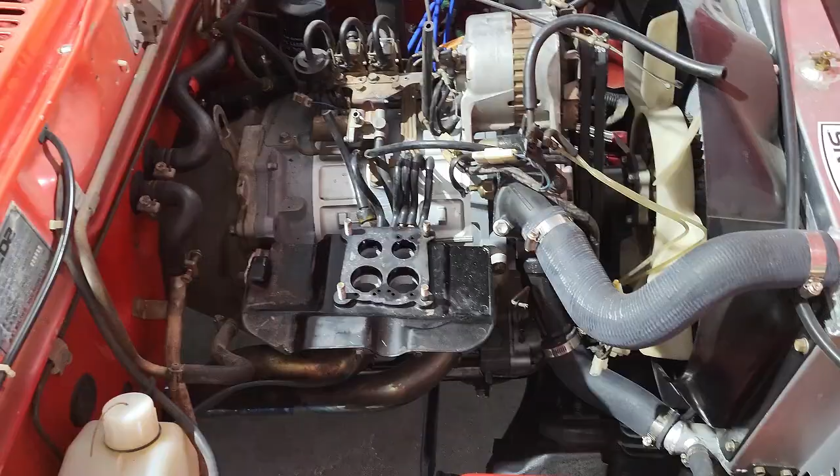Basically, I've already got the carburetor off. It is very simple to do. Got to pull a couple vacuum lines, and there are 4 nuts that are difficult to get to. Not impossible, just a little difficult. You gotta have some magic tricks up your sleeve to be able to get it off. So here is the cute little 12A engine. Yeah, it's literally just those 4 studs that hold the carburetor on.

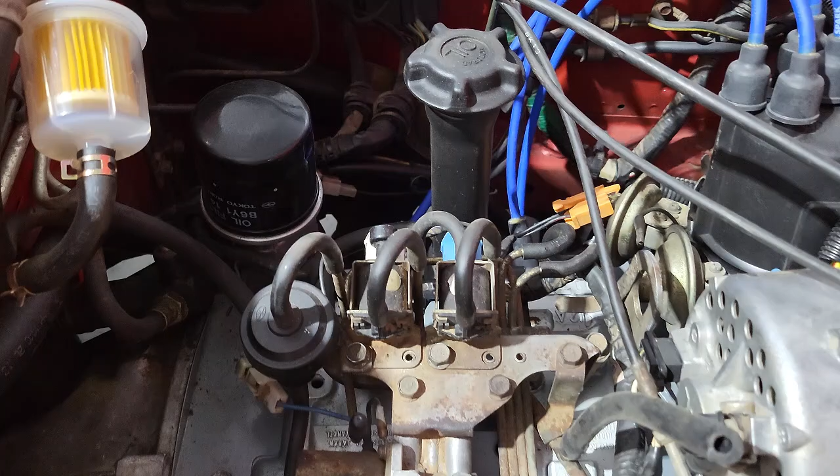This engine still has the vacuum diaphragms, or solenoids, I should say, though the air pump has been removed, and it has a header on it, so the back exhaust flow through the intake has been capped. I didn't do the air pump delete or anything. That shouldn't affect things with the other solenoids on there. And in theory, they should make it run better because they can mess with the different circuits in the carburetor.

There's a lot of circuits in these little Nikki carburetors, just because the rotary engine needs variable amounts of fuel throughout its power band. And so I've gotten all my manuals out to refresh my memory. My rotary swapped MG has this same exact carburetor and setup, but I deleted everything because race car.

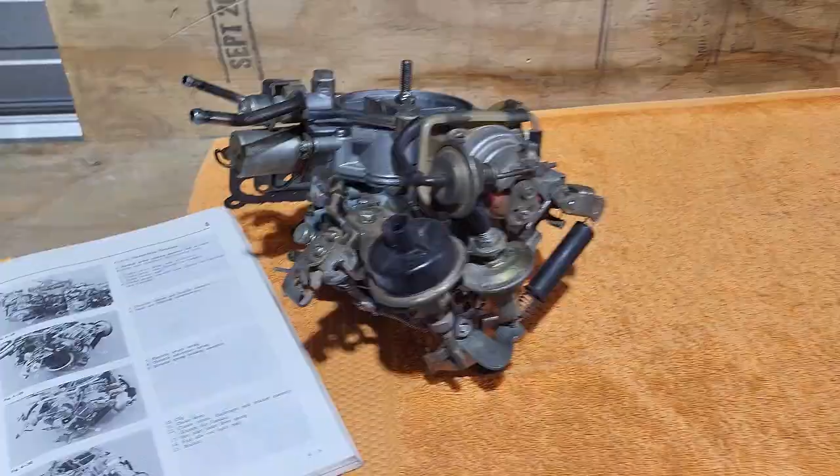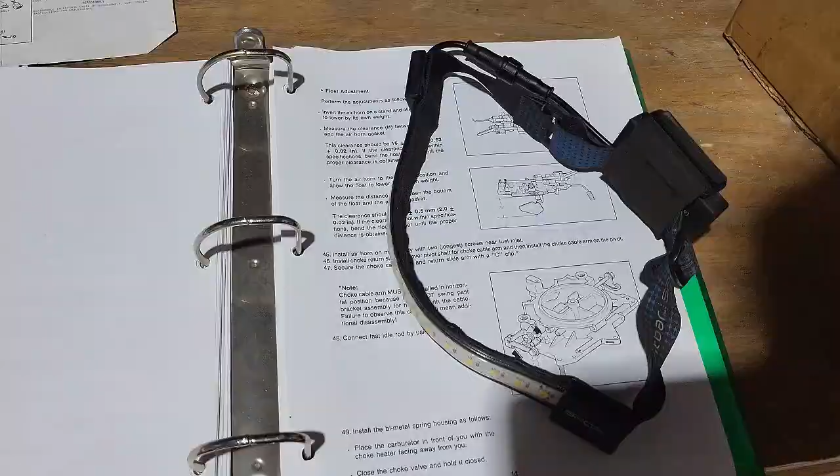So the fun Nikki carburetor's on the bench. I got my 80 workshop manual. It's the same thing as a 79. And then I also have over here, wow, shadows in this place are ridiculous, I printed off this. I found this on foxed.ca. It's a little bit more of a comprehensive carburetor-specific thing, and it gives you a lot more details.

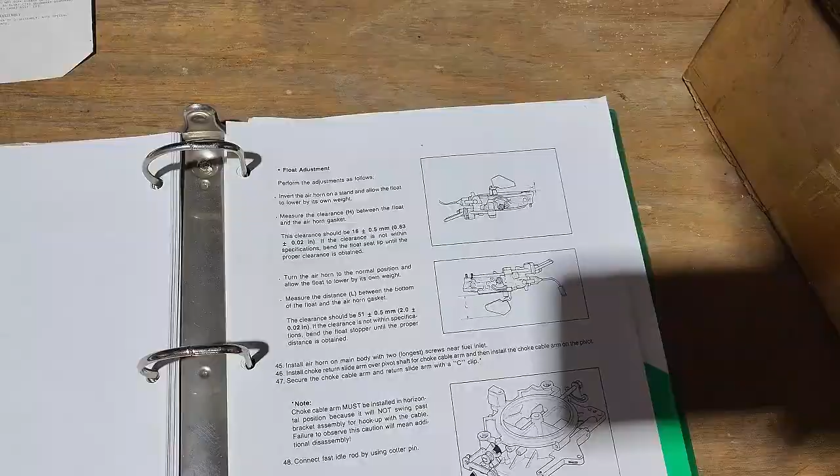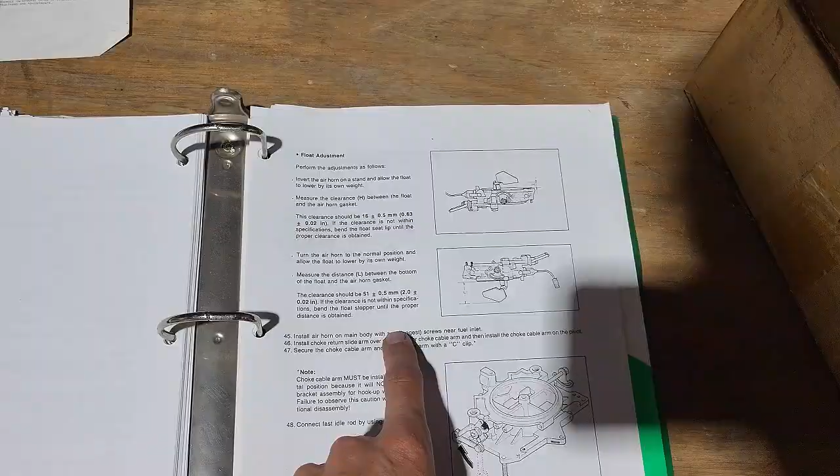And so I'm guessing, since it's flooding, that the float bowls are filling up completely and overflowing into the intake manifold. So we're going to check on the float. And there's a bunch of other little things that I want to check on.

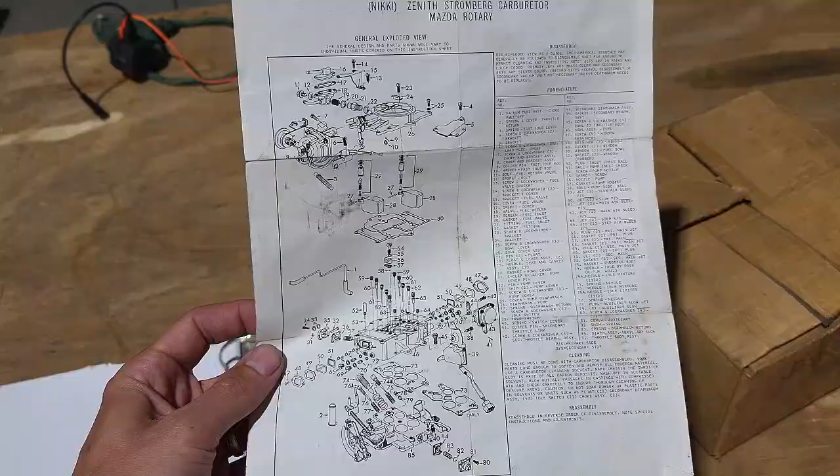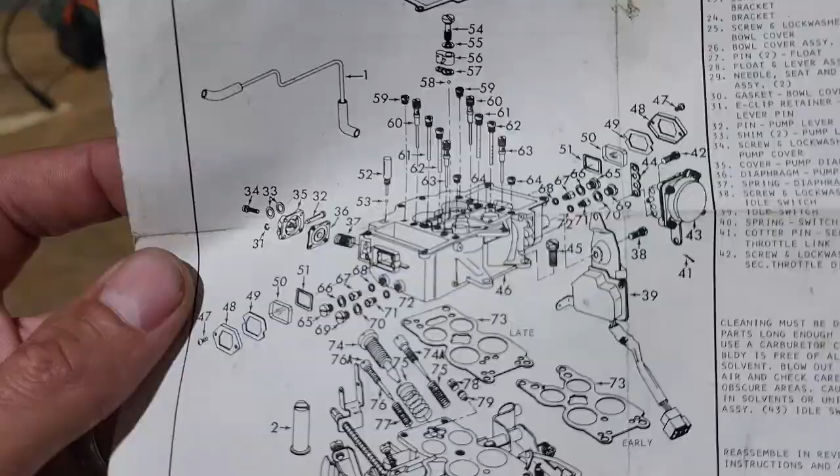And then, this is the diagram that you get when you get a Nikki rebuild kit. This is the only instructions it comes with. Really helpful. It doesn't tell you how to take it apart. Though all the little tiny bits, like 53 and 58, those tiny little ball bearings that are check balls, are very important. So we're gonna go through this carburetor very meticulously and figure out why things are having an issue.

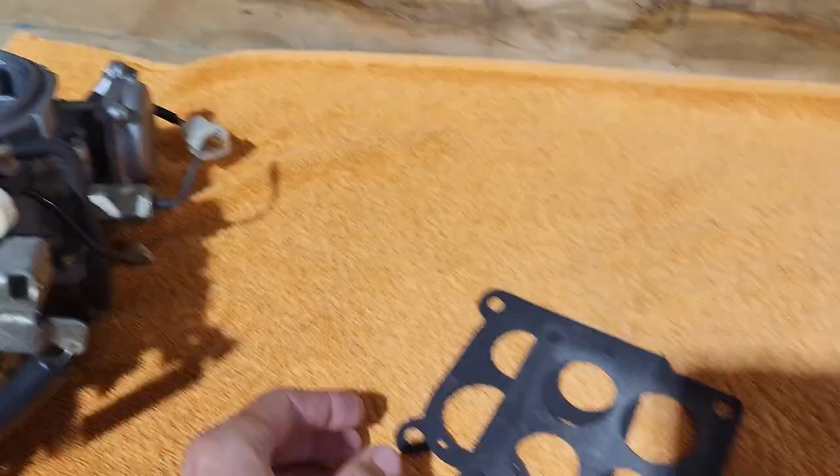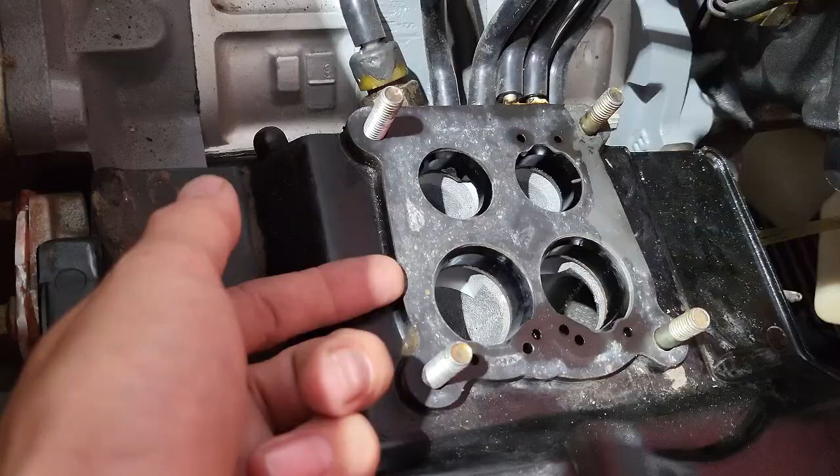Off first glance, when I was taking this off, the previous person did put gaskets on the carb base plate, which I think is part of our problem. This carburetor base plate is made of a material that is basically a gasket in itself. There is an actual gasket glued to it. Don't try to remove this. If you do, you will expose all of the little tunnels where these vacuum lines are hooked up. So this is a gasket. So you don't need to double up the gaskets. Even though the carburetor rebuild kit comes with more gaskets, they're unnecessary.

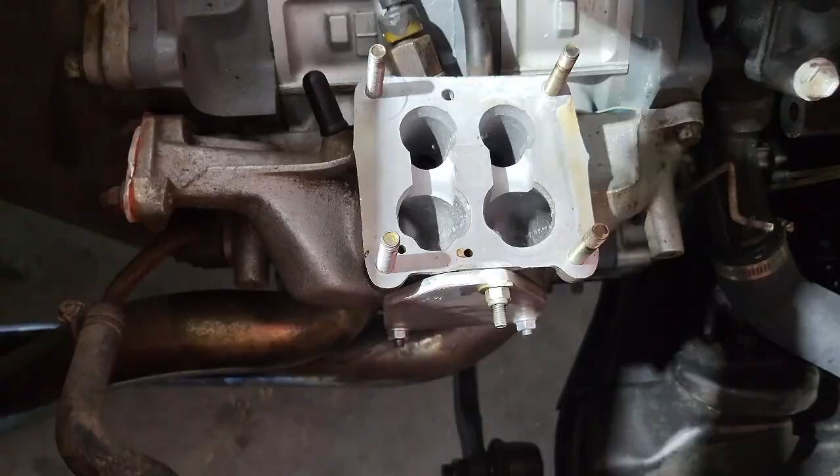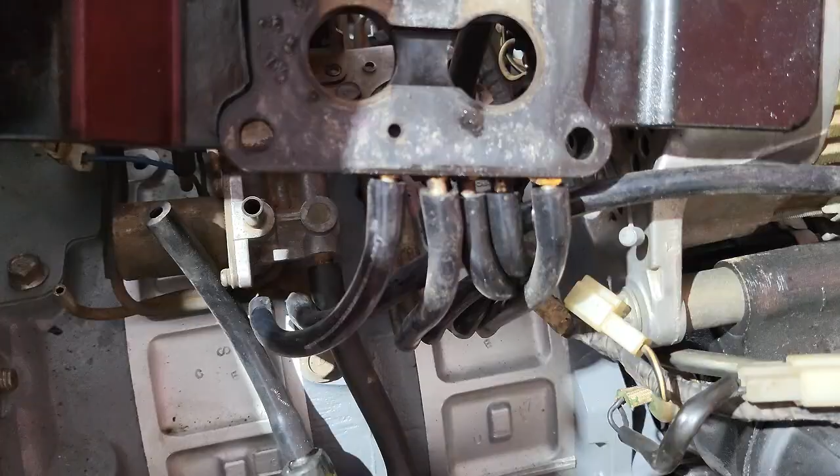So that top gasket did have all these little holes in it, so that was a good sign. Though there was also a gasket under here. Let's see if I can pop this off with one hand. There we go. And as you can tell, there's holes on the bottom side of this too. There's one there, and one there. And they all are like little tunnels to these 5 vacuum ports, and also go down here.

So off the top of my head, I know for sure that this one is part of the altitude adjustment circuit. I'd have to read up what these two do. But essentially all 3 of these were completely blocked by this gasket, which I don't know if that is the source of the flooding, but that's a problem.

So we are gonna, I don't know, we'll see if we time-lapse this carburetor disassembly or not, but we're gonna take it apart now. See if I can set my camera somewhere where it can be seen. Oh well.

So, even though I know my way around this carburetor, I'm still going to use the manual and step-by-step disassemble it, because there is a step-by-step process that makes it easier. I mean, you can go at this and just take shit apart, but you will find out that some things need to come off before others. Let's get to it. Okay.

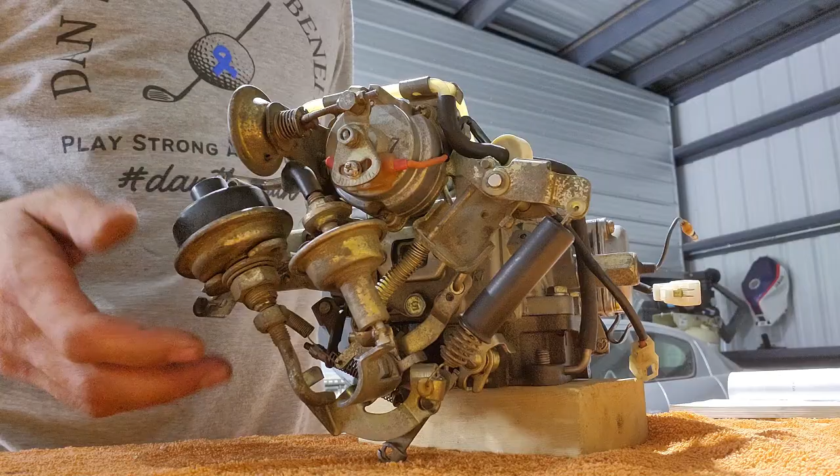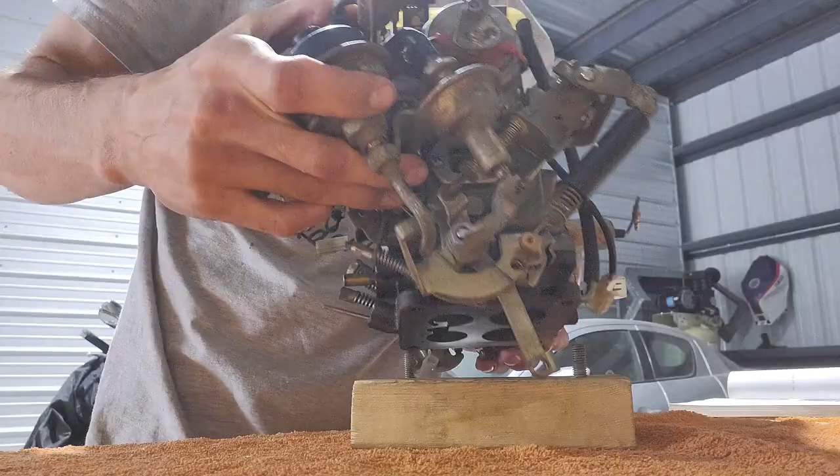So what I like to do is get a little 2x4 and put 2 bolts in it to give the carburetor something to sit on, because the linkage hangs below the carburetor. So it just kind of supports it on the table and lets it not roll around.

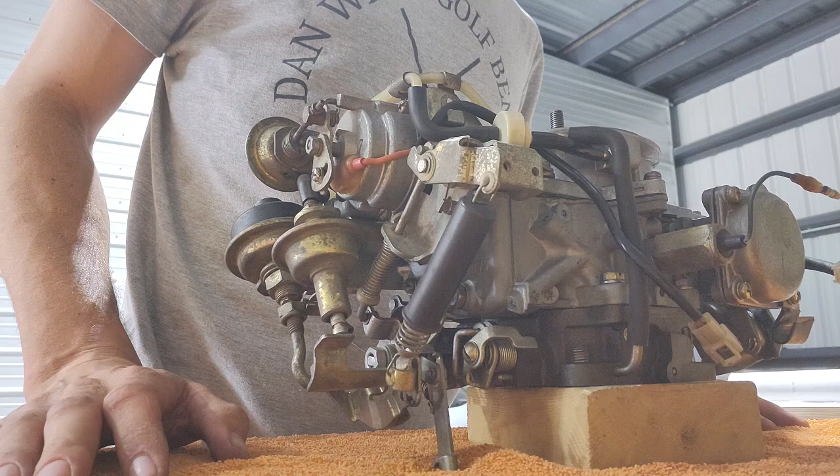So first things first is we're going to take off the throttle opener and bracket assembly and the dash pot. So this is the dash pot, and this is the throttle opener. Set that off to the side.

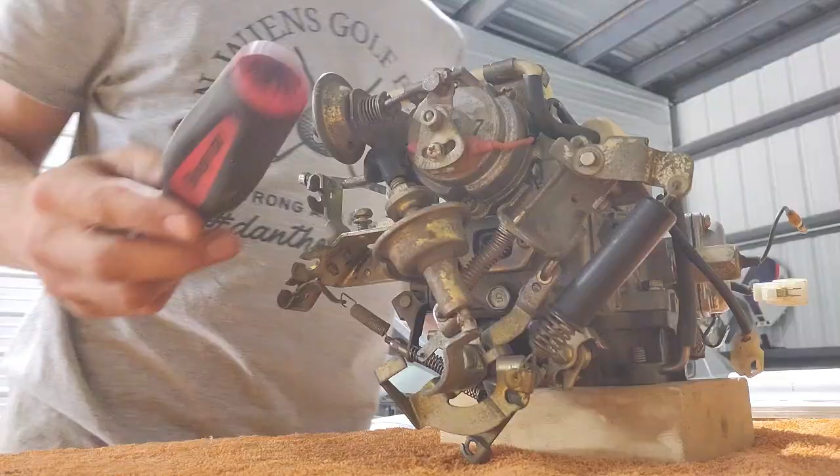Then we're going to get in here and take off those 2 screws that are in there holding this bracket on. With most of these, some of them are bolts, some of them are screws. So you want to make sure you got a quality screwdriver. Sometimes it can be a little tight. Oh, that's loose.

And this dude has a little vacuum line on him, so we're going to be gentle with that. Little twist, rotate, set that off to the side, and we're going to pull the throttle spring.

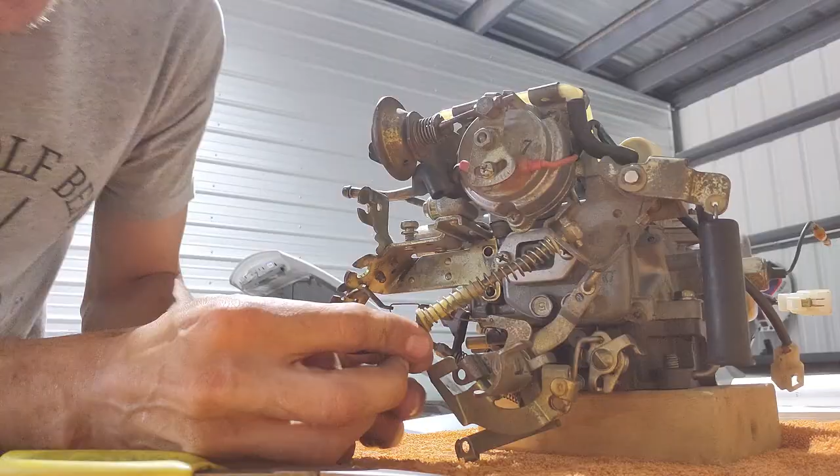And this one has a little baby clippy. What we're going to do is we're going to pop this off. It's got 2 washers on either side of it. And we're going to put the little clippy back in its hole. Okay. And that's just going to hang out there. Like that.

Then the fun part is the choke, because it is somewhat spring-loaded. We're going to take these 2 screws off the top. And there's that guy with its screws in there. And we're going to disconnect this choke lever right here from the top side. And another little baby cotter pin.

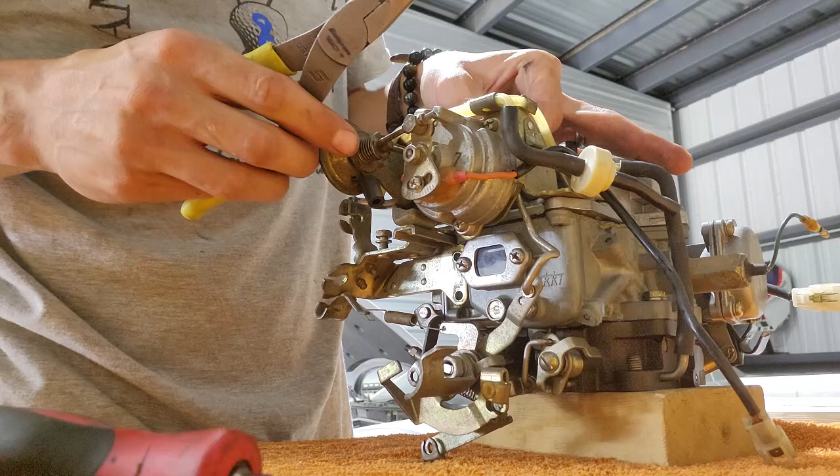I think I've already gone off script on the, well, no, not really, from what the manual says. I'm trying to see if I can remember it. I can. That's going to be crucial to get back up in here, up to there. Let me go put it back together.

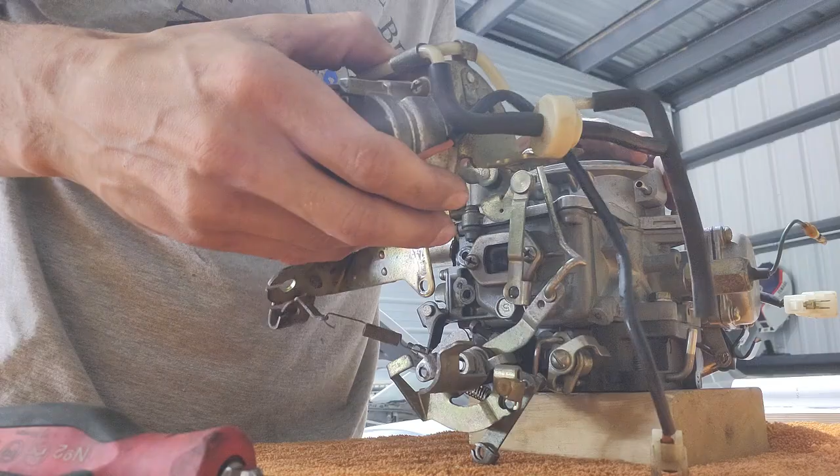Pull this vacuum line off. If I take out this last screw on this back side, yeah, this whole linkage will come off, but this is spring loaded. This is fun to get back on for the choke. It's the electric return, I believe.

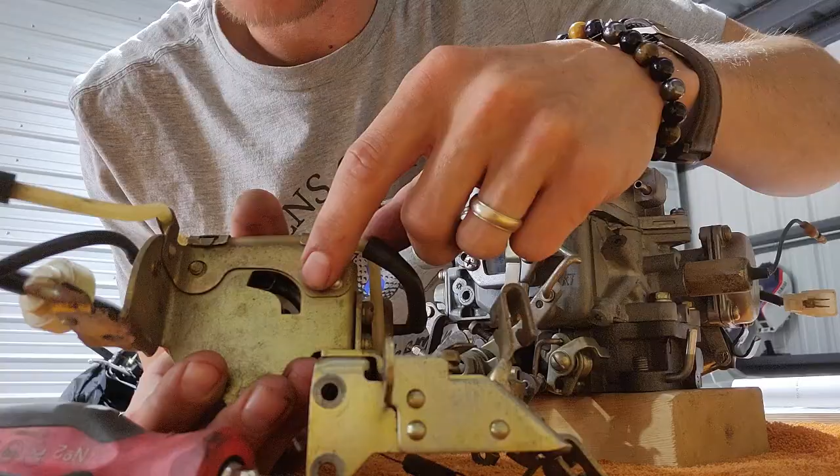So in here is a bimetallic spring that you have to wind up just a little bit when you install it back on this lever. The choke is manual anyways, but this is just a crazy looking bracket, you know. So this is your accelerator pump. Since this car is flooding, I don't think the accelerator pump is the issue.

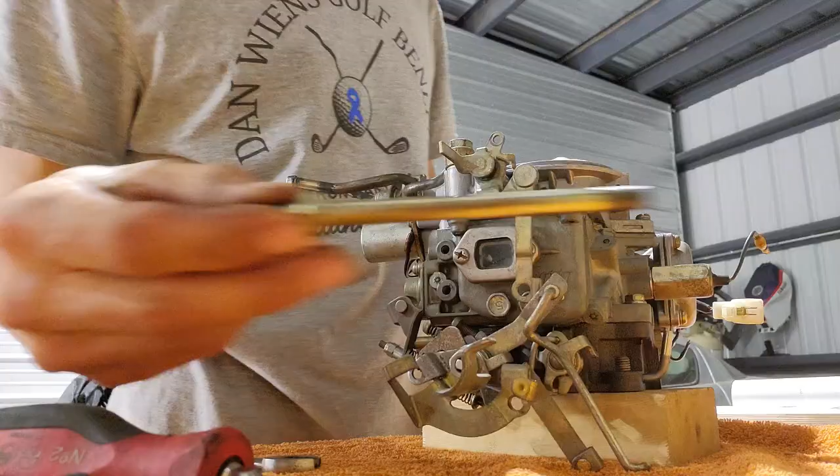And then we pull the long bolt out, and then there's a couple screws. That guy goes over there to that. That hold, what do they call it? The air horn assembly. The top part's called the air horn assembly. And be gentle with these screws. The long ones go right here next to the fuel inlet, fuel line.

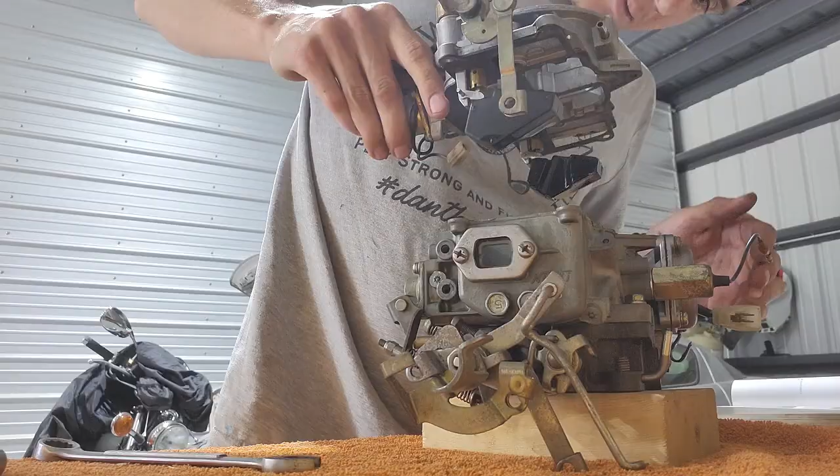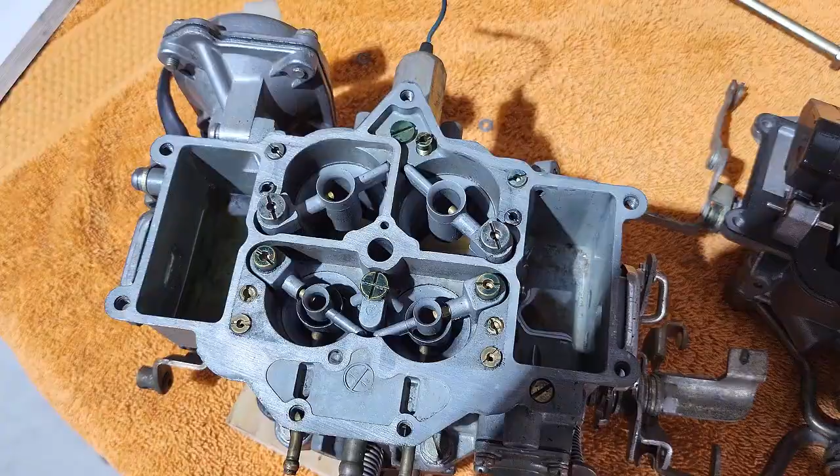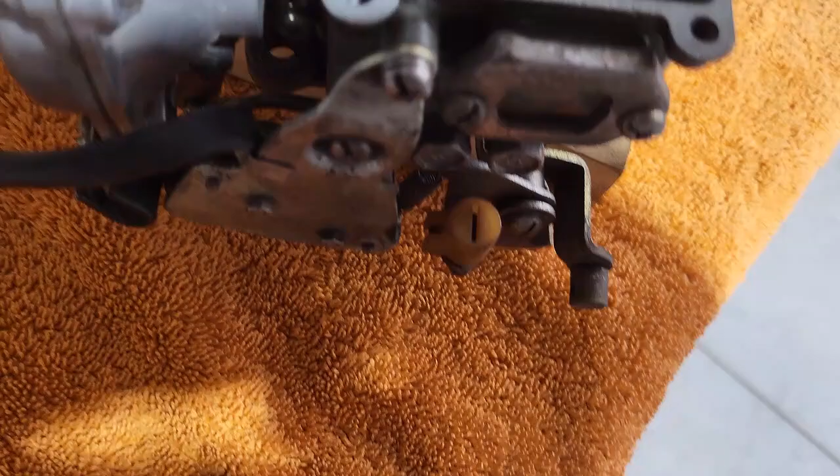Okay, and then this guy has your floats attached to it. So there is the inside of the carburetor and all the jets and the double venturis. Oh my god, shadows. Here we go. The fuel is a little bit yellow, not terrible. We're gonna pull these jets out, make sure there's no crud in them. My theory is that the floats are the issue, so we're gonna look into that next.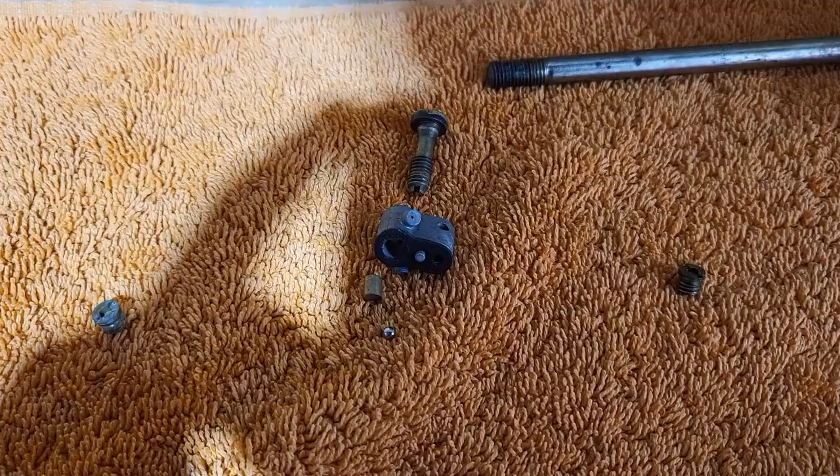So we are slowly pulling out the jets now. This is the part of the accelerator pump. As you can see, a tiny little check ball. I mean, it's so tiny. You want to make sure that all these pieces are in there and they're all super clean. This guy was a little gunky.

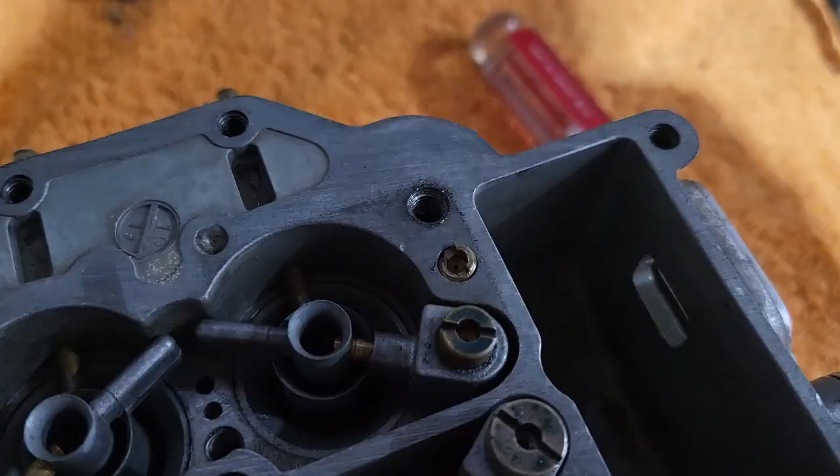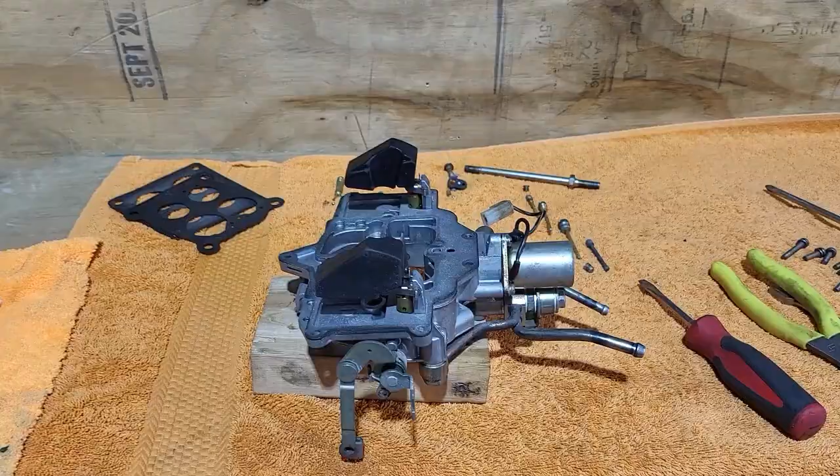So we're going to try to get those out and make sure they're clean since we're here. Quite a tedious little task, so just be careful, use quality screwdrivers, be gentle. Alright, so my initial hypothesis that the floats are off was correct. I did successfully get all the jets out. That one that was snapped wasn't that tight, so thank God I was able just to get it out.

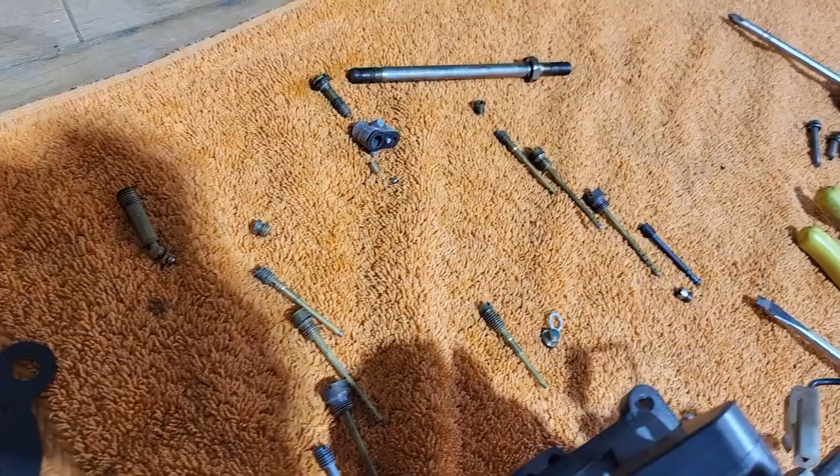So the fact that that's broken isn't going to cause an issue with the carburetor. It's just kind of annoying. Just personal preference. I might be able to replace it. I don't know if I have one. So, the book says, I double checked, both my books say the same thing.

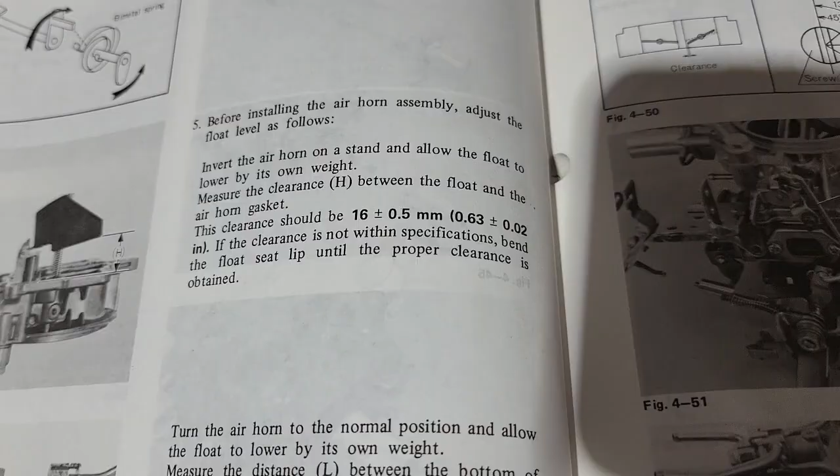As part of the reassembly process, measure the float level with the air horn upside down first, and you measure from the tip to the gasket. It does specify that it needs the gasket. And 16 millimeters plus or minus a half of a millimeter. And then you flip it over and measure the drop. And the drop is measured from the lowermost portion of the float to the gasket as well.

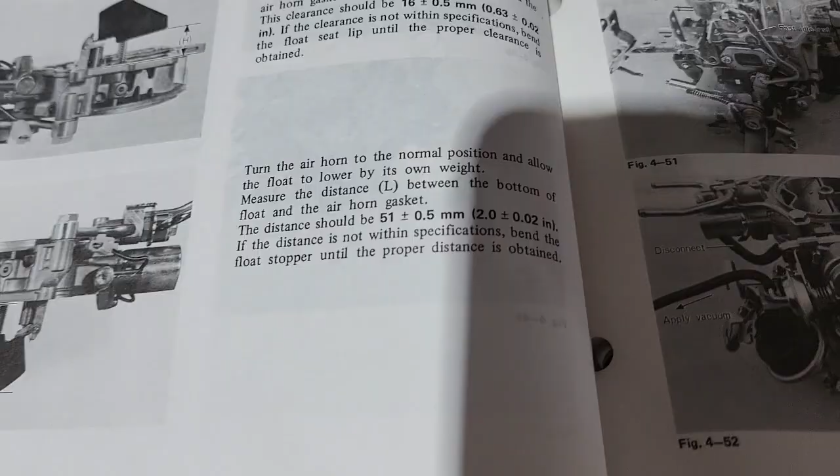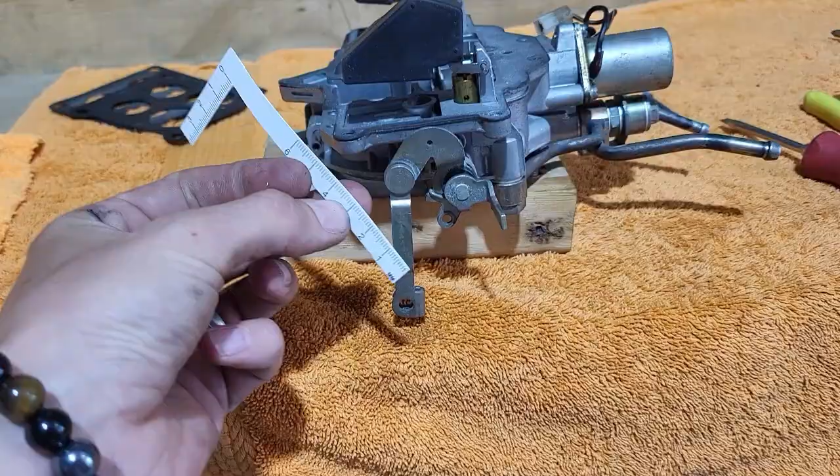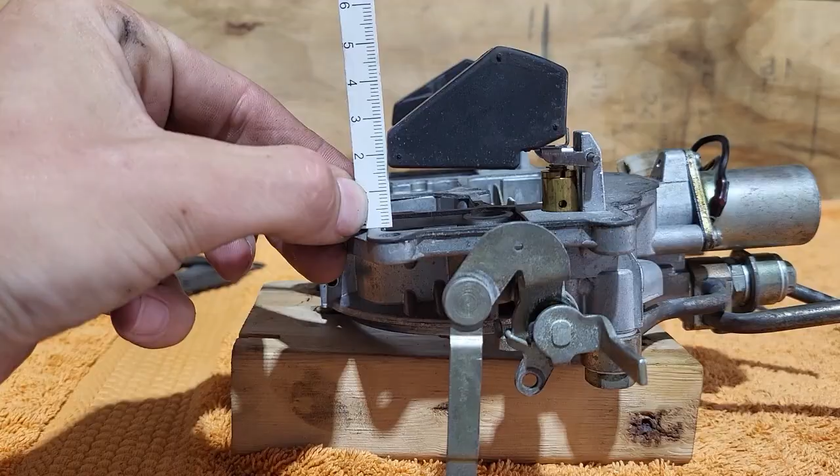So, got it sitting up here upside down. So usually your carb rebuild kits come with one of these little rulers. So I'm going to measure with millimeters. And so we stick it on there. I'm going to see if I can do this and hold the camera. And as you can see, this one is right about 16 millimeters. The one is 10, so.

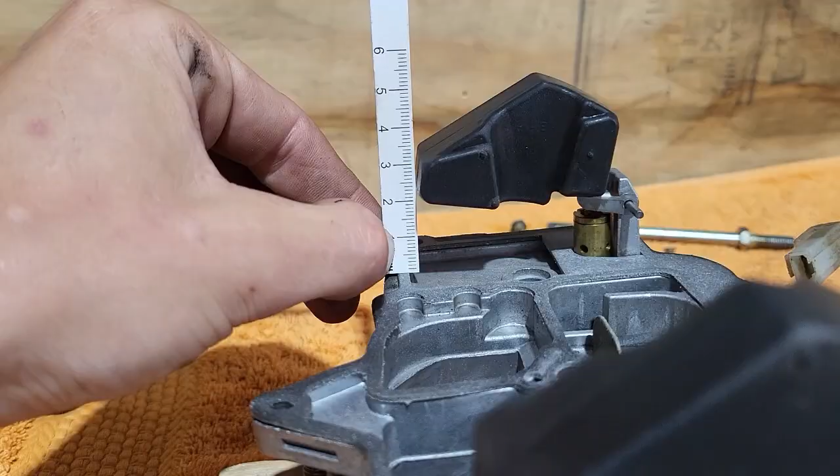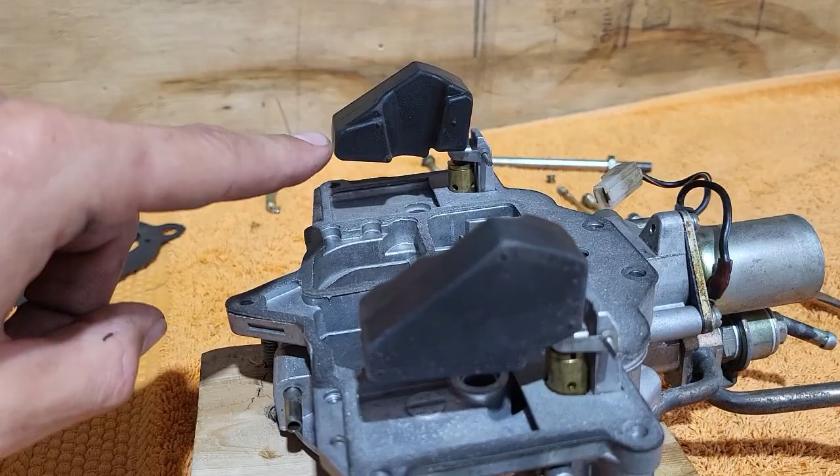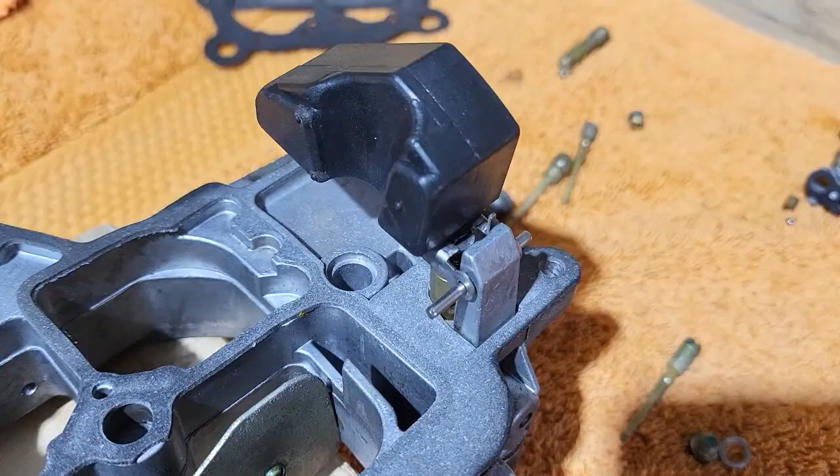But this one, way off. I mean, it's like 22 millimeters. So there's the problem. So going to readjust this one and then flip it over and measure the drop. I also noticed that this float isn't necessarily a different shape, but the little tabby is different than this other one.

So the little tabby on these floats, this is the one that measured correctly. See how long it is compared to this one? I don't know what's going on there. I was told this carburetor was rebuilt with a kit, and in my experience, the kits that you can buy today, the floats suck, and the needle and seats also suck.

So when I rebuild carburetors, these Nikkis especially, I don't replace the needles and seats unless they're like completely trashed. I don't know what it is about these. It's such a tiny little part that you can't necessarily tell with the eye, but they usually don't seat properly. So I don't usually replace them, but this one's already been rebuilt and I don't have the originals. So we're gonna roll with it.

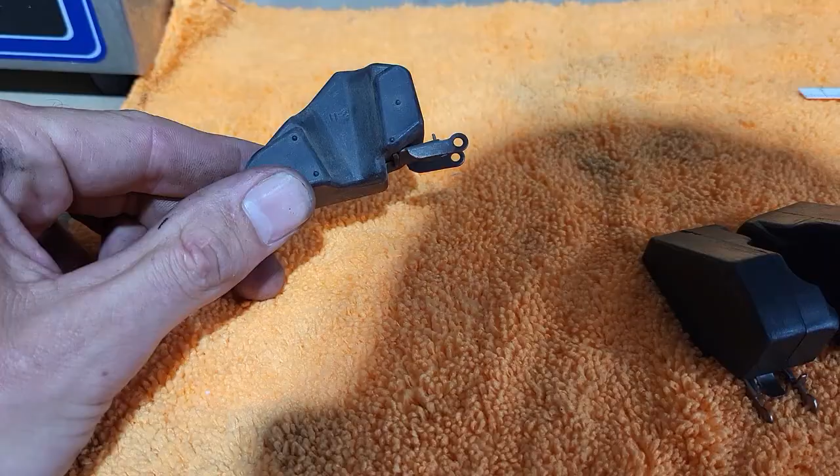I have another float in my collection that I think I'm going to swap out for this one. This is an original float, and its tab is much like the other one here. So that's where I am. Sorry for the shadows. We're going to have to get better lighting for the next video. So we're going to swap out the float for that one and set that one off to the side and use this pair.

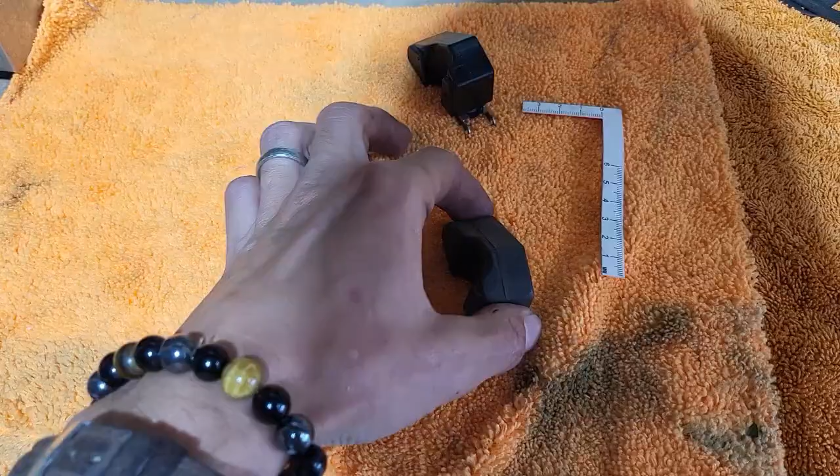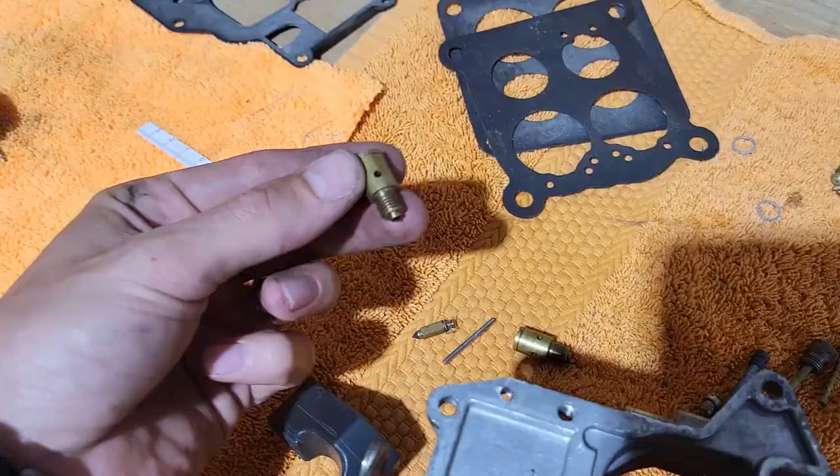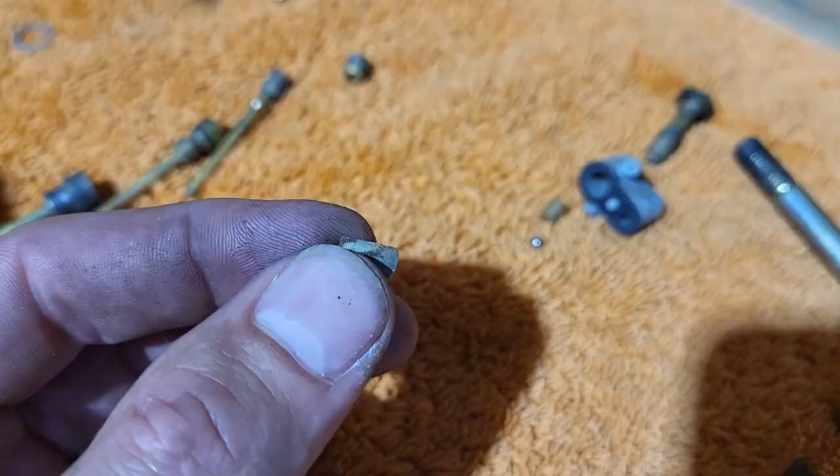Another thing with being really detail-oriented, I thought I should pull these seats out of here and make sure there's only one washer under them, because that will change the measurement. There is only one washer under them. Got that out. Though, I also got out one of the original fuel filter screens that is halfway plugged. And there was only one of them.

They go down under the seat. So I flipped it over and shook the carburetor. So I'm not sure which one it came out of, but regardless, there was only one of them. So that also could cause an issue. I don't know if I will replace those or not. So moving on. Going to reassemble and check float levels.

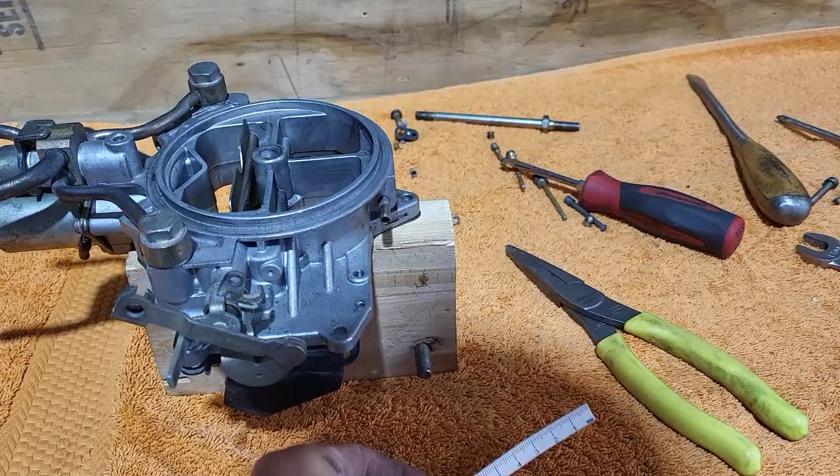Okay, so now the closed position of the floats is good. So now I flipped the air horn over, and I can't really get this accurately with holding the camera. But essentially what you're going to do is you're going to take your measuring stick, push the gasket so that it's up tight against there, and measure the drop of this float.

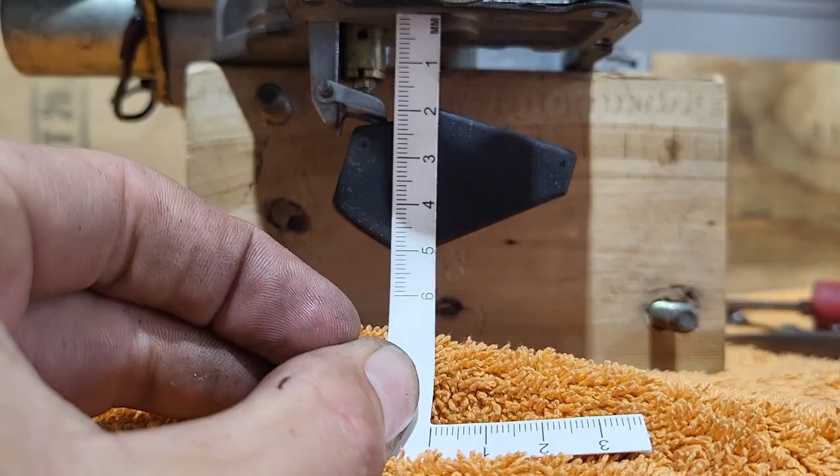And it should be 51 millimeters. So there's the 5, which is 50. Yeah, you can't really tell while I'm holding the camera and this and stuff, but that's how you do it.

So now that the floats are adjusted correctly, that should fix the flooding issue. Because basically it was just being overrun with fuel, and the bowls were filling up, and the floats weren't closing it off completely. Interesting that I didn't really do a whole lot of diagnosis, because literally there was so much fuel going into the carburetor. I'm like, well, the floats are stuck.

So, one float was good, and the other float, like I showed you, was a little weird, and way out of adjustment for the closed drop, which would result in overfueling. So pretty sure that should fix it, along with not running those gaskets between the carburetor base plate, blocking those vacuum or air holes, vacuum lines, stuff.

We're super technical here. So now we're gonna put it back together. I don't have any jets. That's kind of a bummer. So we're gonna have to reuse those ones with little broken tabs. Yeah, so let's put it back together.

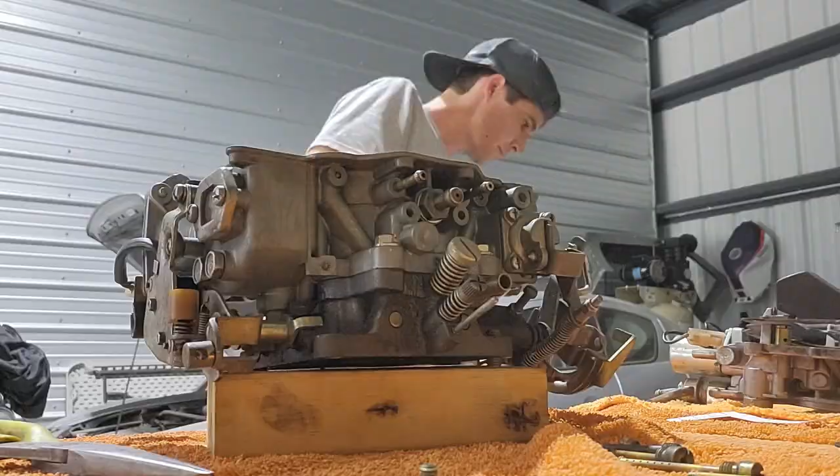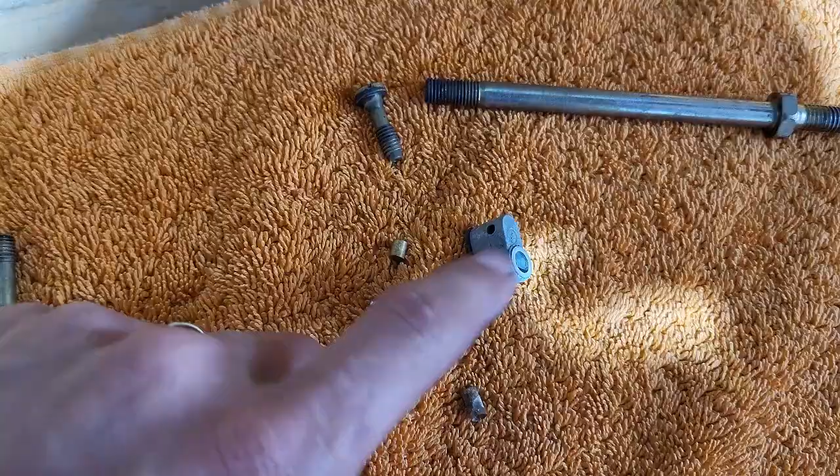So I'll go over this real quick. These tiny little check balls. So it goes in the big hole for the accelerator pump. And then check ball, little cylinder, this guy with little gasket, and then the screw. And then this is the other side of the accelerator pump. Little ball, also a little cylinder, and then that screw. And that one goes in that hole.

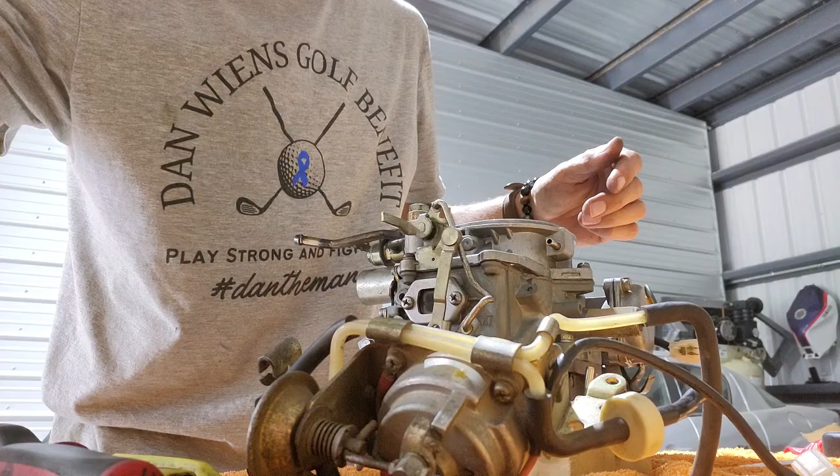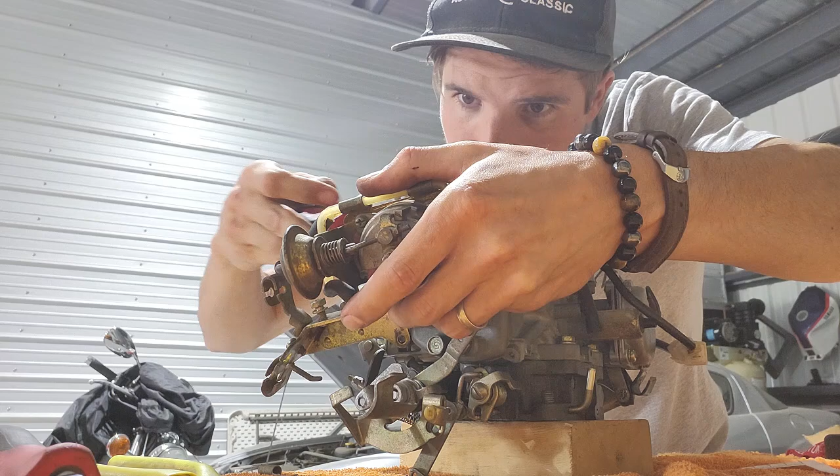Alright, so this is the most tricky part of the assembly. So there's, like I said, the bimetallic spring in here. I want to make sure you got this rod up here so that it goes on top of this bracket. I want to already hook up this guy up here, and then take your screwdriver, pull that spring down, see if I can get it on camera, and then slip that lever in like that. There we go.

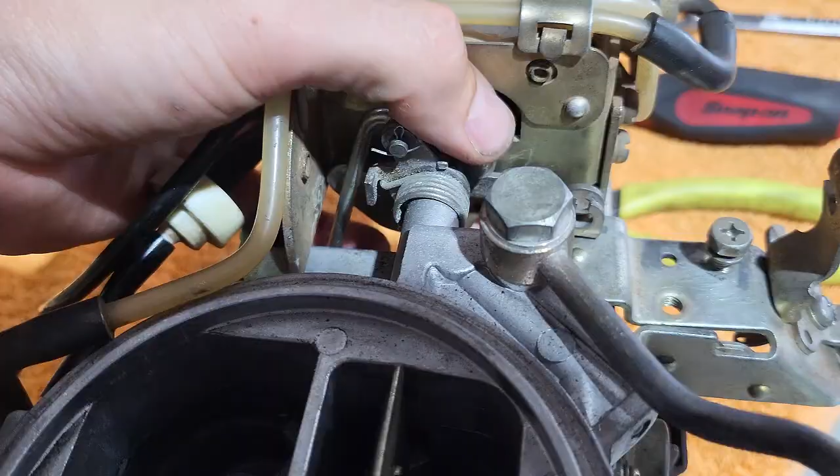So you want to get the spring under this lever, and then make sure that this guy is on top here. And then put your couple screws in there. Hold that there. The screw. So all these have lock washers on them, so they don't need Loctite. You really don't want them that tight in case there's any disassembly in the future.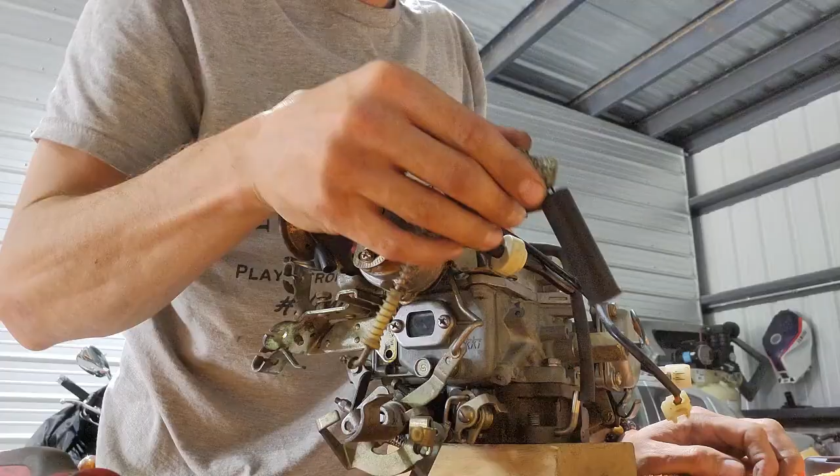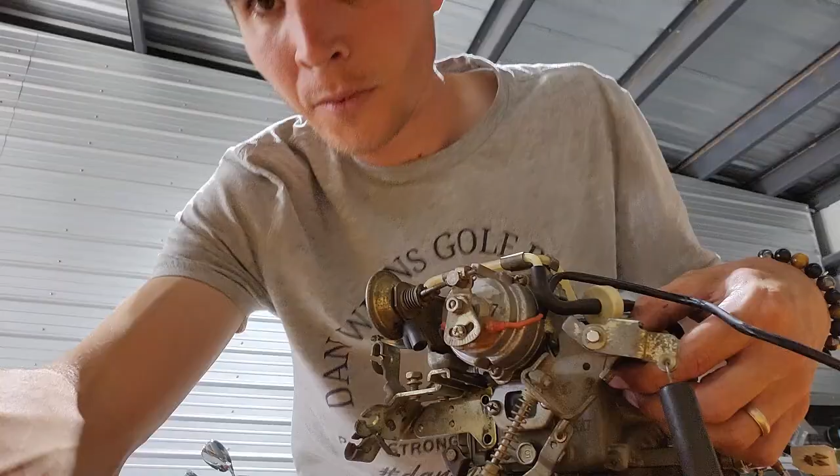I'm missing something here. That goes on there. Okay, so once you get that bracket on with the choke and the bimetallic spring on there, you can go ahead and put your throttle spring bracket on top of there and make the sandwich. Then the long screw goes all the way through the air hat into the bottom portion, and then the short one just screws into the air hat itself. Get that one started. There we go. That tightens down, and that tightens down.

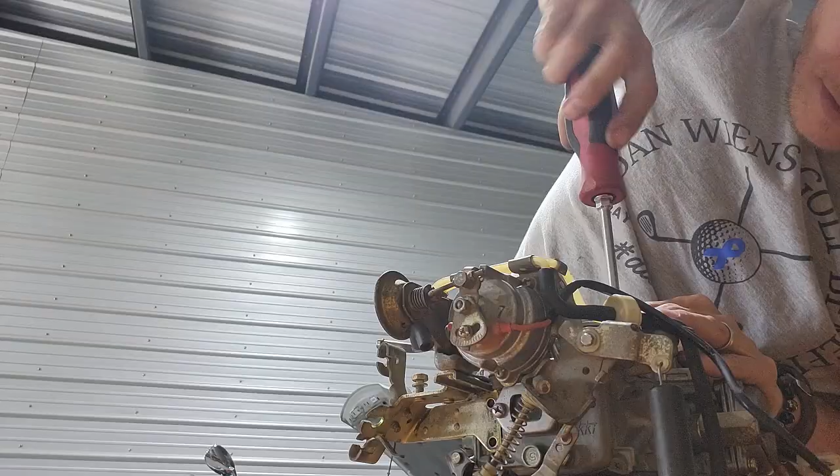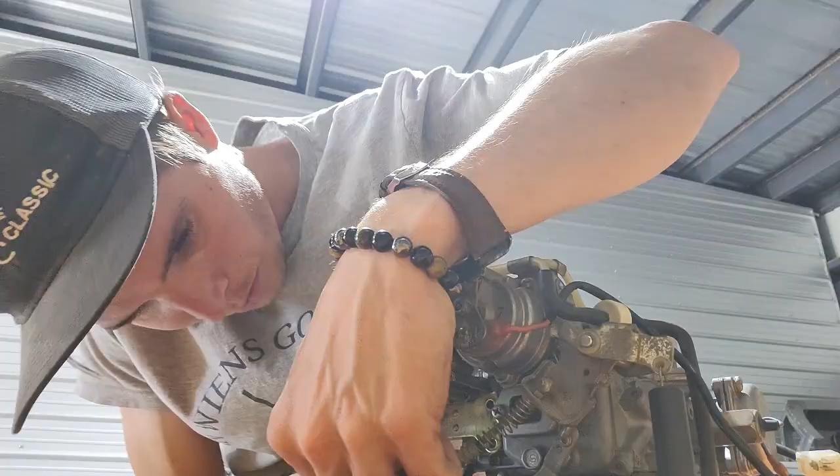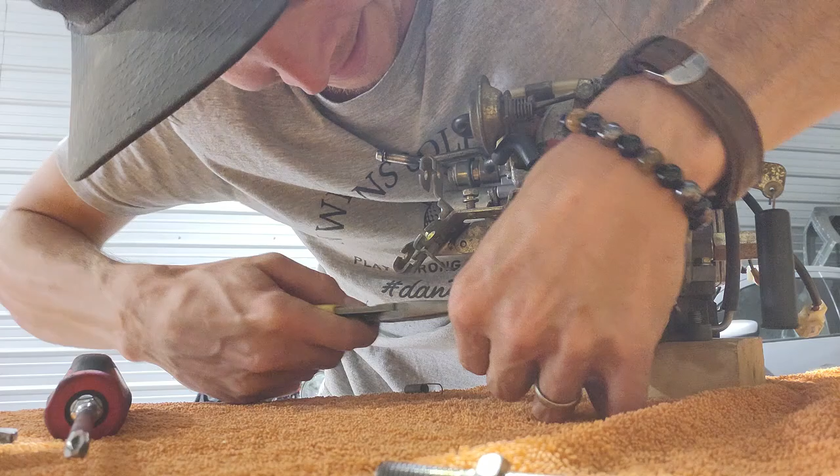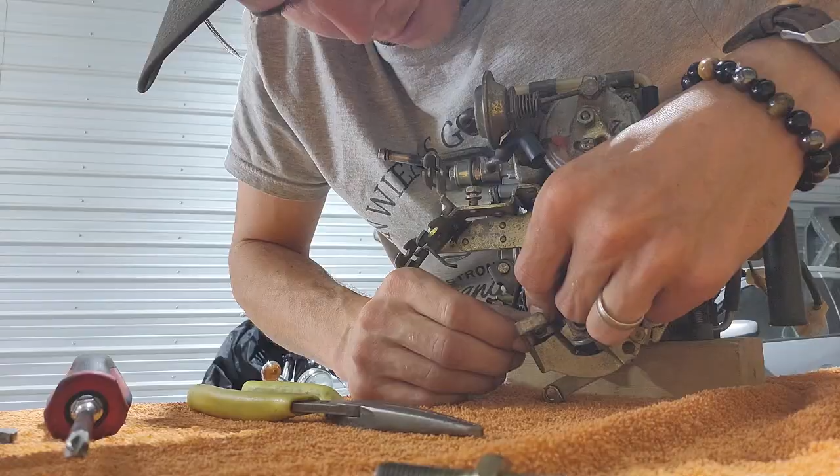Hook up those two lines now. And then you can hook up this return spring. Show you what I'm doing here. Get my hand out of the way. A little baby washer off there. Put it in there. Put the washer back on. And then put the clip back in there. Oh, dropped this spring. The spring goes from this little guy up to here. Like that. There we go.

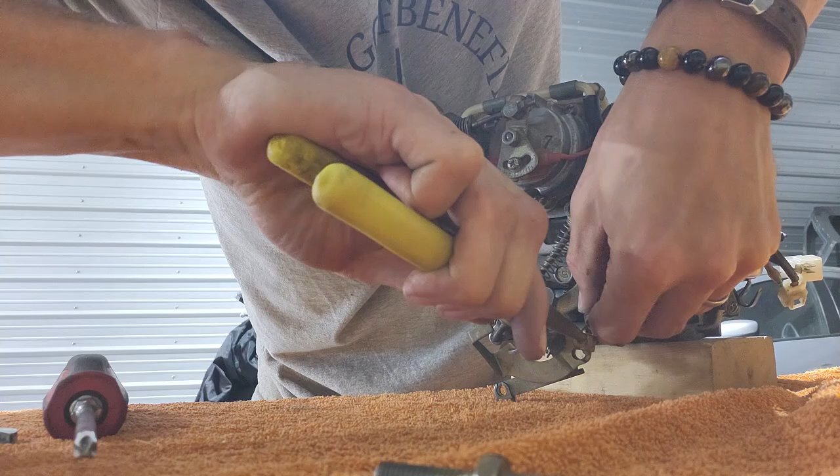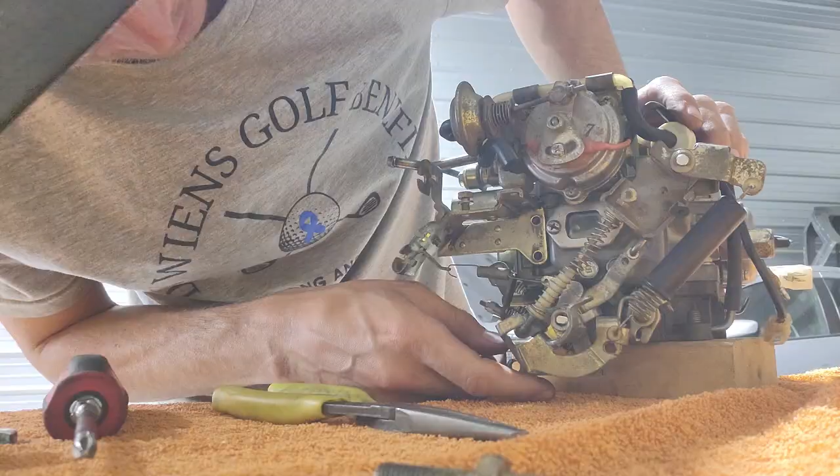So when you take apart this linkage, if you have to really do a deep clean of this carburetor, just take a lot of photos. That's the best advice I can give you. Because the manuals, even if you have the really nice manuals, they don't really help you out too much. And I'm not diving that deep into this carburetor right now. This one doesn't need a full restoration, just a little bit of cleaning. So now we can put this guy back on here.

So maybe in the future I will do a full-blown comprehensive emissions removal on one of these, because you don't really need the bimetallic electric spring. I mean, if you're doing a hot rod, you don't really need that. The choke is cable operated anyways. You don't really need this dash pot. You obviously need the return springs, though. The one thing we are going to do in this video is show you how to change the vacuum secondaries into mechanical secondaries, and that is the easiest thing in the world.

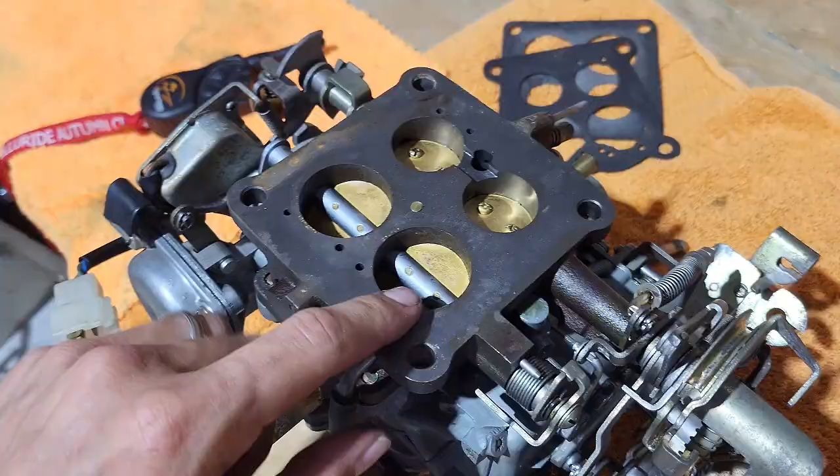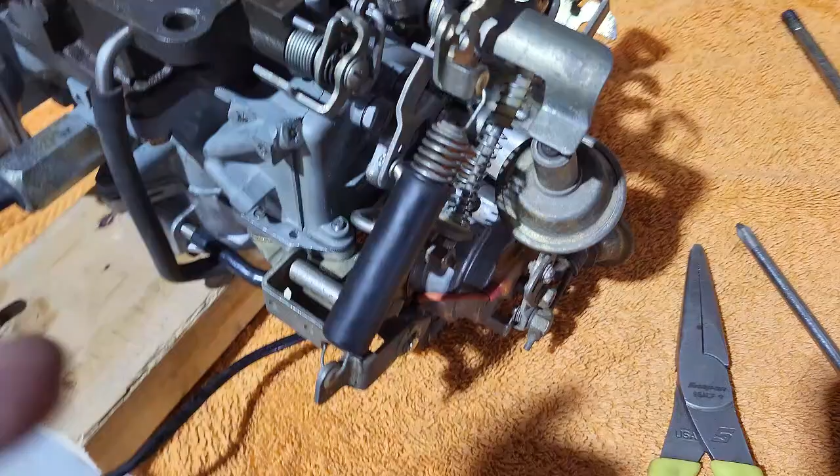So, carburetor over here. The secondaries are the bigger ones, primaries are the little ones. These are normally operated by this diaphragm right here. You can basically override that. So when we twist the throttle, that is just primaries, right? But it is also moving this lever right here, which operates the secondaries.

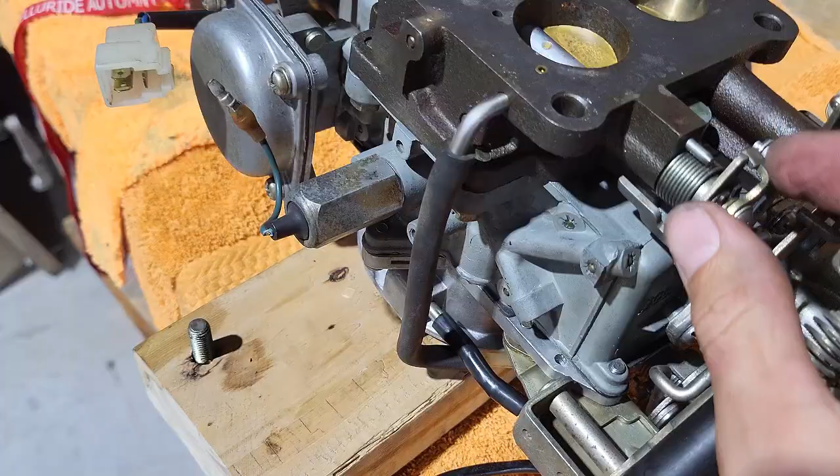Let's see if I can. So that last little bit right there is where the secondaries open. But this linkage has to move in order for the vacuum to even open. So what we're going to do here is we're going to tie these two spots right here together, and that should make it mechanical.

Alright, so now it's time to put the carburetor back on the car. I got it all put together. Got this all assembled. I think the only thing I did off camera was put this guy back on. And it's super simple. So we're gonna go ahead and put it back on the car and watch it work.

I find easiest is to actually hook up the throttle linkage before even putting the carb in place, kind of having it on its side. Hook up the throttle cable, the choke cable and the throttle return cable, and then plop the carb on there and fidget with the nuts in the really tight places. So good luck. I'll see you on the other side.

Well, I got it. Took me about half an hour to get those 4 nuts on. That is the most difficult part of a 12A carburetor, getting the damn nuts on the base plate to bolt it to the intake. So, yeah, that seems to be the problem.